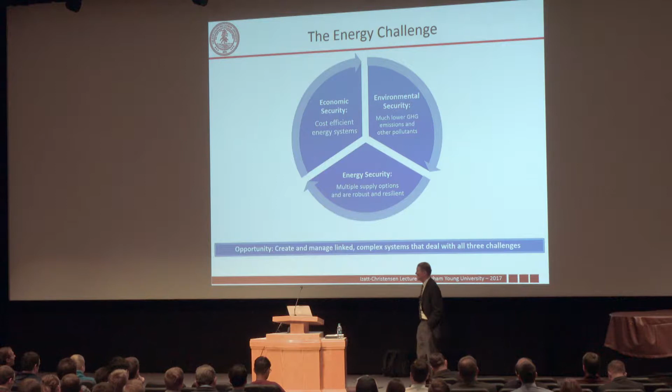So if you think about the energy challenge, it really has three parts: economic security, environmental security, and what I would call energy security. Let me just say a word about each of those.

On the economic side, energy is woven through every aspect of modern society. A good exercise, if you want to think about this, is when you wake up in the morning, think about everything you do during the day, and make a list of how you used energy. Did you take a shower? Did you use your toaster? Did you get in a car and drive somewhere? On and on and on. You can do that on your own, but it's hard to live in modern societies without taking advantage of energy, and those costs are embedded everywhere in what we do.

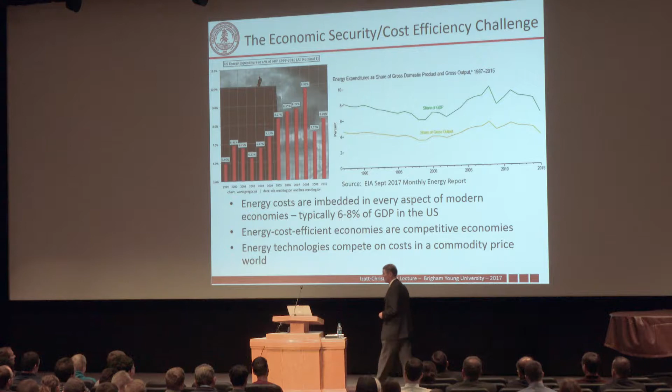It's typically in the U.S. 6 to 8% of the GDP, so that's a big number. Economies that are efficient in the way they use energy, particularly cost-wise, are ones that are economically competitive in the world, and that's something we want. Cost matters here. Energy is supplied and used as a commodity, so one of the things we in the research community need to do is work on ways to bring costs down, to make things more efficient, and everybody will benefit.

I would also say we have a responsibility, I think, as humans, to work on energy access around the world. Somewhere around 1.3 billion people don't have access to electricity now. We've made lots of progress in poverty around the world, but that number really hasn't changed over the past decade. So there's a chance to work, and of course I know many of you have worked internationally, there's a real opportunity to do better than that, particularly in sub-Saharan Africa and developing Asia. We should add that to our list of important things to do.

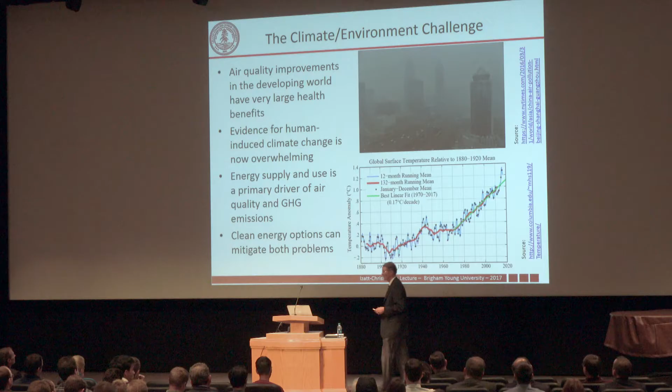So you say, okay, fine, what kinds of things are we trying to change? Well, right now, of course, 85% of the energy we use around the world comes from fossil fuels. And those are carbon-based. If you look at carbon emissions, they really have grown quite a lot in the last 2.5 decades or so.

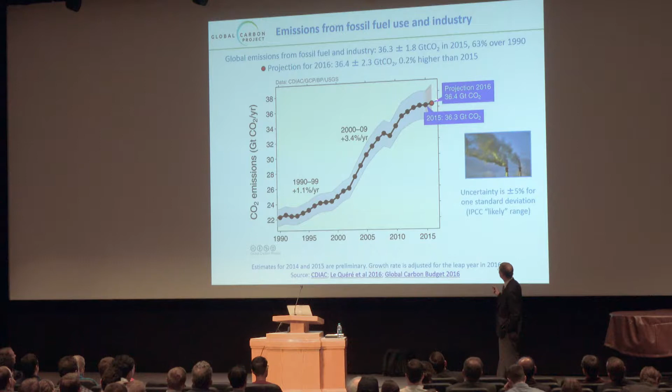But the interesting thing is that they have been kind of flat for a while now. Part of that was due to a global recession, and that's not how we want to do this—it would be better not to take that tack. But at the same time, there is some evidence that we're beginning to transform the system.

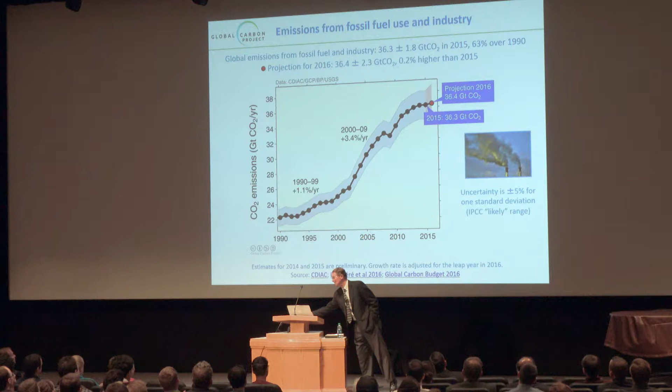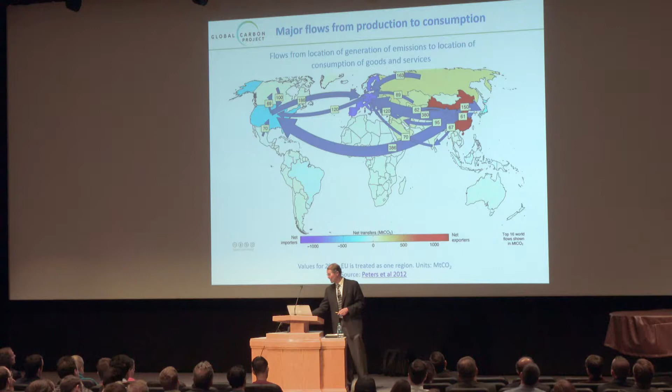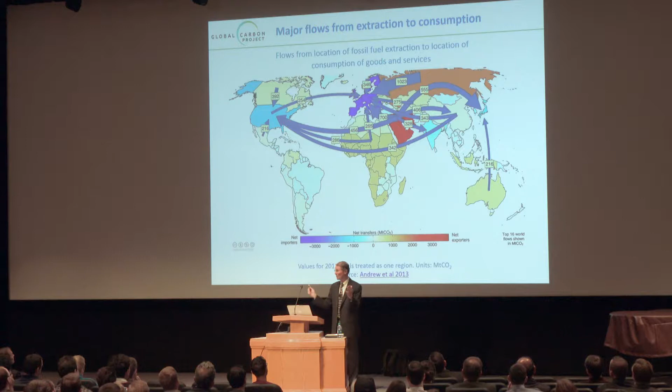So you say, okay, fine, we're convinced. Now let's do something about it. If we are not using the fossil fuels, or if we're using them in some other way that makes that lower in carbon emissions, what do we do? What energy resources can we use?

But the message here is that there really is no shortage of energy. There is plenty of it around. It's all about how we convert it from whatever primary energy resource it is into an energy service like electricity or warmth or any of the kinds of things that we do.

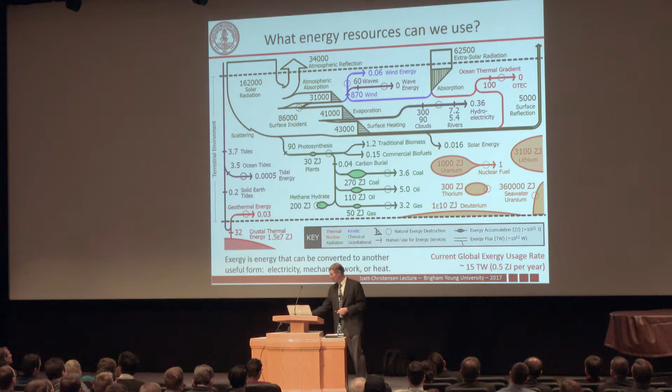So the problem is not the energy. So what do we do now? Well, and is it changing?

This is U.S. energy, and you can kind of see the top part is primary energy production. There's been a big transformation—oil production has really changed over the last 6 or 7 years in the U.S. Natural gas production has gone up, coal production has gone down. In energy consumption, natural gas is a bigger fraction, petroleum is just about flat, and coal has declined a fair amount as well.

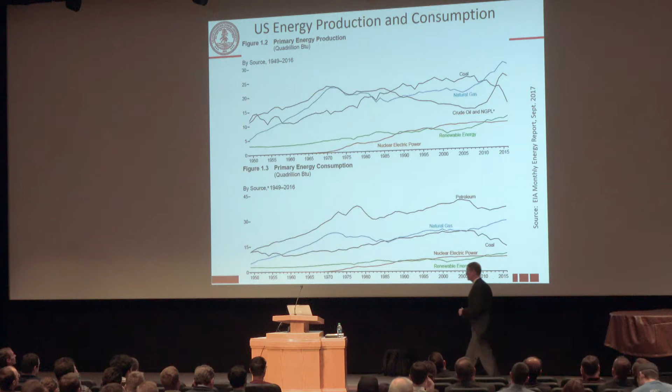Nuclear power really has stayed the same, but renewables are growing. So let's take just a moment and look at some of that. This will be interesting to see if I can manage to stay on the stage while I do this.

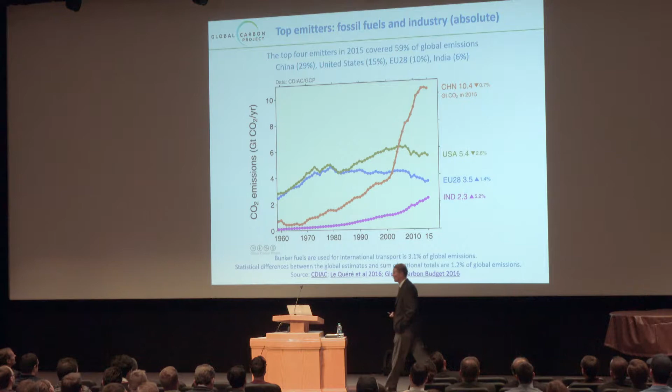If you look at the top emitters around the world, China has really grown very fast in recent years. The U.S. has actually declined a bit. Europe has declined a bit. India is increasing as well. These two reflect the growing developing economies and are both a challenge and an opportunity.

If you just look at the share of emissions from energy use and making cement. Cement is made from basically calcium carbonate rocks. What you do is heat it up, drive off a CO2 molecule, and you're left with calcium oxide, which then you later react to make concrete.

I said that natural gas has increased in this country. There really has been a revolution in the last decade, but it was a revolution a long time in the making. It required the ability to drill long-reach horizontal wells, this kind of magical control. It's like, in a way, taking a piece of spaghetti and trying to drill through Jell-O by pushing the spaghetti through the Jell-O.

You go, wait a minute, this is never going to work. What does work, however, is to pull the drill string through there, and at the same time, these rocks, the shales, are ones that it's very difficult to flow through. So the way you make it possible for the gas stored there to flow is you create some cracks in the rock. That's the hydraulic fracturing part.

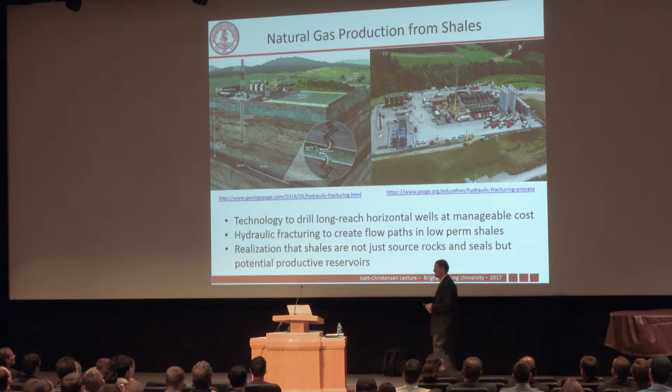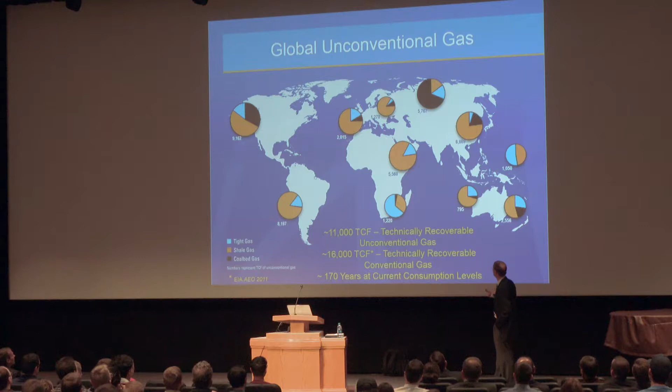Turns out there are lots of these shales around the world. Ours are deep marine shales that have lots of organic material in them. China's shales are there too, potentially lots there, but they are not as productive as the ones here in the United States. So we're still kind of exploring how all of that is going to work.

So you can say, okay, how is this changing the mix of energy that we're using? And the answer is partly slowly, because these are enormous systems. But if you just look at new power capacity additions by fuel, coal plants are still being built, but some are being retired, particularly in this country due to market forces. Solar PV is big, wind has been big, natural gas has seen some installations and retirements. If you add up all the renewables, about two-thirds of the power capacity additions last year were renewables.

Now, word of caution here. Capacity factor is what fraction of the time you actually use that resource. It's typically maybe 20% for solar, might be 35% for wind, might be 95% for a nuclear power plant. So if you weight these, this is what's on the nameplate capacity, not necessarily how much power it produces.

But if you also look at energy consumption by energy type, you can kind of get a sense of the trends here. Coal is still growing, but perhaps the beginnings of a peak. Oil is still growing—oil to first order is transportation, diesel fuel and gasoline. Natural gas is growing fast. Nuclear is pretty much flat. Hydro is growing nicely, and other renewables at 15.2% a year. So the renewables are growing fast, but they're doing it from a small base. We need to examine that and see whether that can continue and continue to contribute.

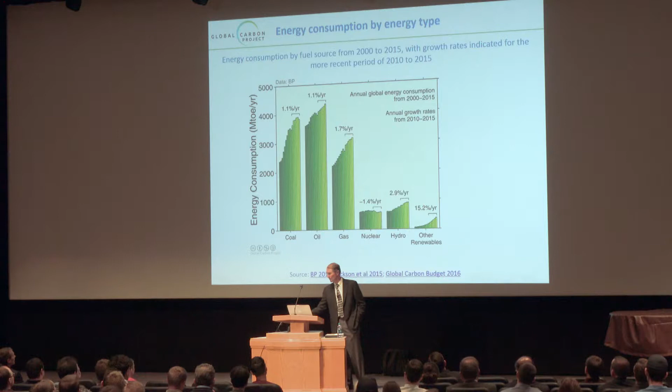And the answer is yes, partly because there have been deep cost reductions over the past nine years. If you look at these against the 100% baseline in 2008, wind is down by about 30%, utility-scale photovoltaics by about 50%, batteries have dropped in cost, and LEDs are down over that period by about 94-95%. So you go, wow, how did that happen? Well, part of how it happened was that we began to get to scale in manufacturing them. The first LED bulb I bought cost $60.

You might say that was economically crazy, but hey, that's what I do, right?

At the same time, as manufacturing took place a year and a half ago, India bought millions of these at about $1 each. Learning by doing and figuring out how to manufacture at scale really did reduce the price. So that's a possibility.

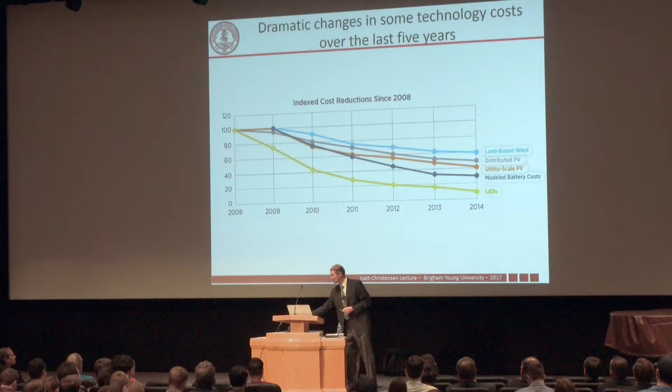So what lies ahead? The first point is that we should work to improve energy efficiency everywhere. We've left ourselves a lot of room to do better in this country on energy efficiency, that's the politest way I can say it. We can do lots of things that reduce energy use at negative amortized costs—in other words, it pays more than pays for itself. So you ask, well, why don't we do it? And that comes back to these pesky humans who make decisions that aren't always economically rational.

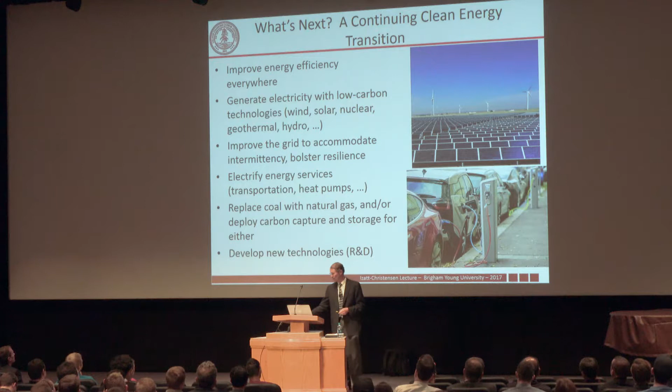Then we should generate electricity with low carbon technologies, and there are lots of those. We need to improve our grid to accommodate the different set of services that go with intermittent renewables, and we need to work on bolstering resilience, as Puerto Rico and Napa Valley have both illustrated. We can electrify energy services like transportation and use heat pumps more effectively. We can replace coal with natural gas, or deploy carbon capture and storage for either one. Or, and I'll argue at the end that we need to be willing to do this, we could develop and deploy new energy technologies. Let me take a moment to talk about each of these.

If you look around this country, about 40% of all the energy we use ends up in a building somewhere. So that's a place we ought to look. With technologies that pretty much exist now, we could get that down by a quite substantial amount.

I can tell you the experience of my own house. About 10 years ago, when I put in solar cells—they cost a lot more then, I wish I'd waited—I looked at the energy use and sized the system. But while I was waiting for the panels to arrive and be installed, I got out my watt meter and went around and measured everything in the house. The stuff I couldn't unplug, I looked at the nameplates. By the end of that, I had a pretty good idea where the electricity was going, so I could change the way I operated things. With a capital investment of maybe $100, I reduced our electricity use by about a third. I'm pretty sure I'm not alone—there really is an opportunity.

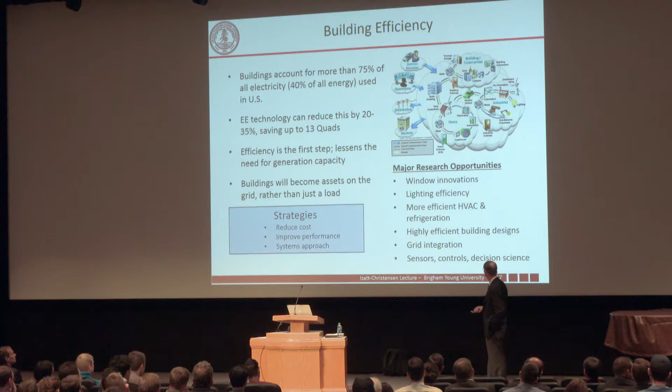There are lots of things we can do: windows, lighting. In my house I'd gone to compact fluorescents, but now I'm switching everything to LEDs. Heating, cooling, and refrigeration are areas, particularly in the developing world, where there's real opportunity to do better. With efficient building designs, our experience at Stanford has been that the incremental cost of designing and building an energy efficient building is maybe 2%—not much, as long as you build it in from the beginning. So there really is an opportunity.

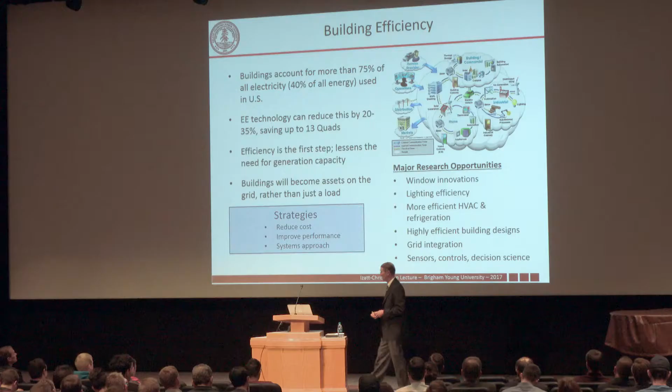Here I'd also say this whole question of sensors—I think we're entering sensor world. We're able to build less expensive sensors now that can communicate wirelessly and less expensively. This causes an avalanche of data we have to think about how to use, but nevertheless there are lots of opportunities for improving efficiency there.

Let me say a word about what we did on the Stanford campus, because I think there's a lesson in this too. We had a 50 megawatt gas turbine on campus, combined cycle, pretty good for its day, which we used for heating and cooling. But we noticed there was this overlap all year round of taking heat out of buildings with the cooling loop and putting heat back into buildings for other services—some in wintertime for heating, but there were all those others too. So instead, we replaced the combined cycle plant. It was at the end of its life, and we also needed to work on a leaky, creaky steam distribution system.

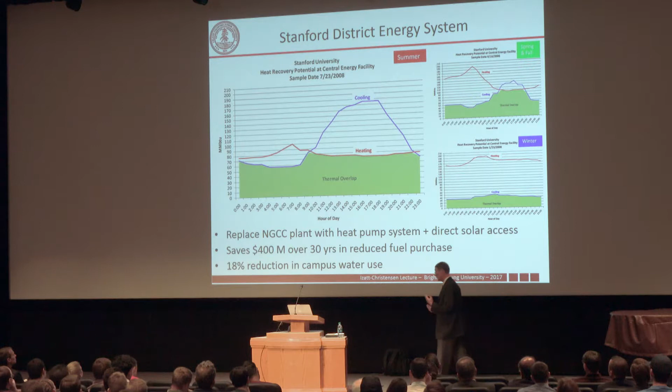The basic idea is you take the heat out of where you're cooling, you take the heat out of buildings, and push that back with the heat pump into the heating side, and not buy fuel to do that. It saves about $400 million over 30 years from reduced fuel purchase and reduces water use, which for us is a big limitation, by 18%.

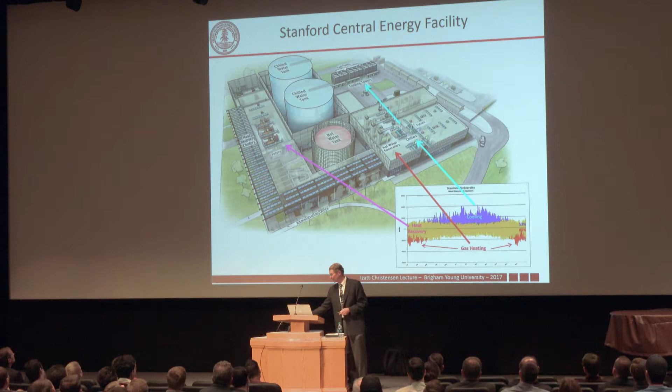So you go, well, all right, this sounds pretty good. How do we do that? There's a set of heat recovery chillers - these are just big heat pumps. They're various natural gas fired hot water generation, so there's a little bit of gas heating here, and then there's some cooling towers as well. So we can put that together, and they also worked on a very cool control system that really helps things as well.

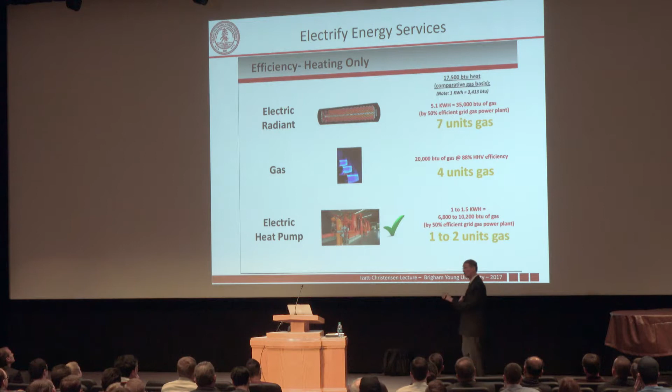The fundamental reason for this is that if you just use electric radiant, that's basically how your toaster works, right? Because of the thermodynamic hit that comes when you make the electricity and then turn that back into heat, that one may use 7 units of gas for the service. You can heat directly with gas, that does 4 units, but if you use a big electric heat pump, even paying for the electric power it takes, you can use 1 to 2 units of gas, and if you're willing to put some solar or wind into that as well, you can reduce it further.

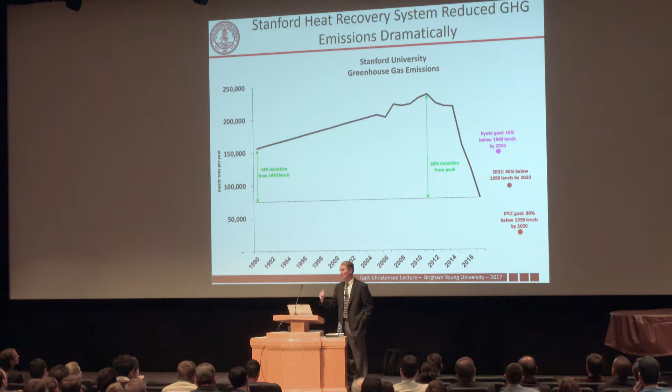So what this did was give us - this is actually measured - so far a 54% reduction from 1990 levels and 68% from peak in our greenhouse gas emissions for the campus. And I note again that it saves hundreds of millions of dollars over time, so this is a project which pays for itself by a big amount.

So what about clean electric power? Well, obviously wind we can use. This is growing rapidly, about 5.5% of U.S. electricity, but it was 4.5% last year. So this is growing - adding 1% of the electric power generation for this country in a year, that's a big deal. And it is 77,000 jobs in 2015.

There are lots of research opportunities for how these things can be done. It turns out that if you can steer the wind turbine so that you line it up in the wind, you can actually steer the wakes so they don't interfere with the other wind turbines nearby. This takes lots of computational power to figure out how to do this, but there are remarkable things we can do there.

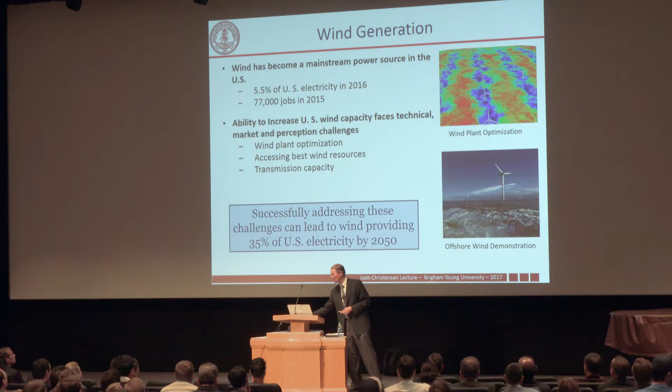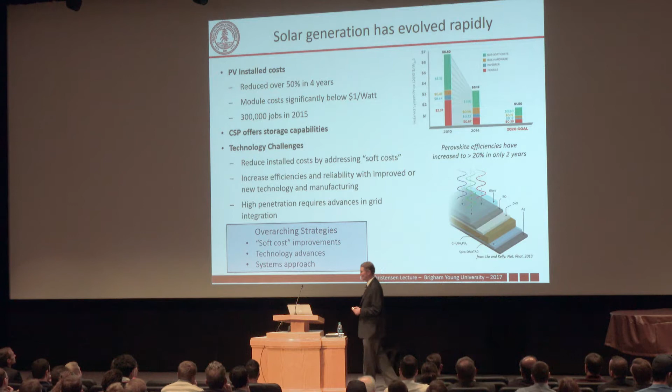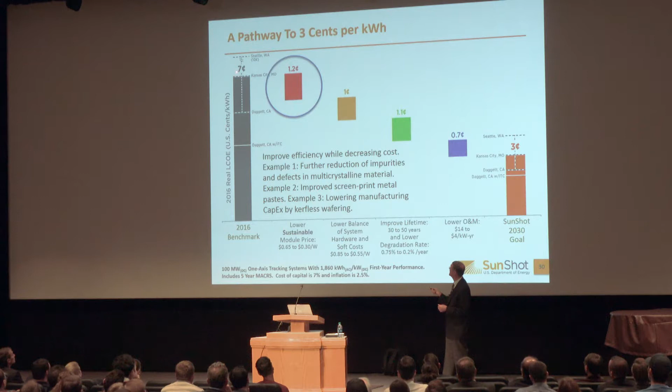I'll talk a little more about the technical details in a moment, but near the end of my time at DOE, it's pretty clear that we're going to make the SunShot goal for 2020 of 6 cents a kilowatt hour - we're about 7 now, so we'll make that before 2020. But then we said, well, what else can we do? We eventually convinced the secretary that there were multiple pathways to get down into the 3 cents a kilowatt hour range, and maybe even 2.

You say, well, gosh, that's really competitive, why do you want to do that? Well, the answer is because if you get to those kinds of costs, then you can afford to do another transformation that involves energy storage. It could be liquid fuels, it could be all kinds of things that gives you some room to do that.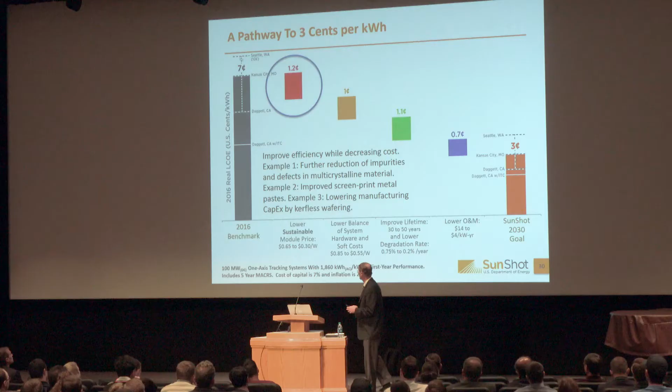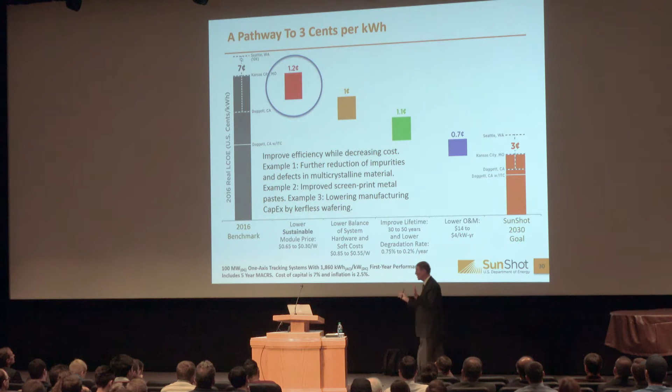Now, I don't mean to minimize the difficulty of doing this. There's lots of options - you can see module prices, balance of system hardware and installation costs, lifetimes, operations and maintenance, and there are lots of things to do here, and we did lots of analysis of each of these. So what are the options? I'm not going to go through all the details here, but over the last 15 years, a project I worked on at Stanford really invested in the fundamentals of all this.

In that period, we put together one cool idea after another for ways to manage light, to get lots of light absorption, but easy ways to catch that electron before it recombines with the hole. If that happens, you have a warm solar cell, but no electricity. And these new things called perovskites have just rocketed into our attention as ways to generate more efficient electricity using advanced material science.

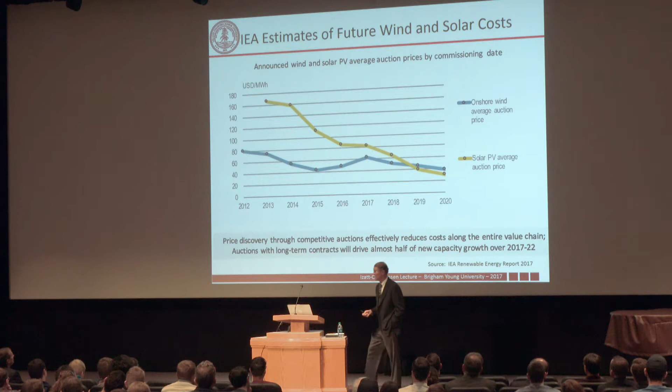So if I picked out one area that really applies across almost everything, it's the material science side of things. If you look at the International Energy Agency's estimates of future costs, this is a quite recent report. Even these are based on power purchase agreements for delivered costs and long-term contracts, so these are real data, and they show continuing declines in cost. They're not as low as the ones I showed earlier, but in places without grid access, this really makes a big difference.

What about the nuclear side? Well, about 19% of current U.S. electric power generation is from nuclear. It's base load - these plants run over 90% of the time. And you say, well, is there an issue? And the answer is yes, and it's cost.

These plants are having a hard time competing in areas where dispatch is based on a bid system, and natural gas can supply this electricity at a lower price now. So some of the plants are struggling. There is one possibility on the horizon that might make a difference here, though it remains to be seen - that's a small modular reactor.

There's a kind of mock-up of what one might look like here. There's a company called NuScale that has just submitted an application for design certification, and they have agreements for the first couple of these reactors to be installed. They come in 50 megawatt lumps, not 1,000 megawatt lumps. So the cost per watt is about the same as a big nuke, but you don't have to lay out $8 or $10 billion to buy one of these.

So if you bought my argument about getting to scale, having smaller unit costs is one way to try to deal with that problem. There are plenty of research kinds of things going on as well, but they are much farther out, and they require big government investments because they're so expensive to do. Waste storage, siting, licensing and construction costs are all still big issues.

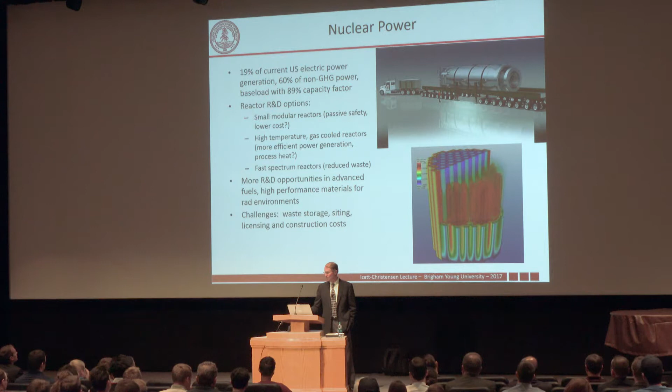There is a fair amount of construction going on around the world. China is building 24 plants right now. So the situation in the United States is not exactly the same as elsewhere.

On the carbon capture and storage side, we capture commercial quantities of CO2 every day, in refineries and natural gas purification, so you can sell the gas. These are mostly done with solvents - amines of one sort or another. The real problem is cost.

And so there are lots of cool things - I'll talk more about this tomorrow - and there's some very interesting things going on here at BYU that it's fun to think about how those can contribute.

You then take that CO2 and put it into the subsurface. We have a lot of experience with this - we've been doing it for enhanced oil recovery since the early 1970s. So we have a lot of experience of what happens in the rocks underneath. You have to choose sites well and operate safely, but when that's done well, we can put the CO2 there and keep it there.

Now, there was a very big DOE-funded project at a plant called Kemper, which was a gasification project, combined cycle, plus carbon capture, and then using the CO2 for enhanced oil recovery. It had lots of cost overruns, and this was a pretty complicated sort of 5 chemical plants put together, and they could never get all the pieces to work right.

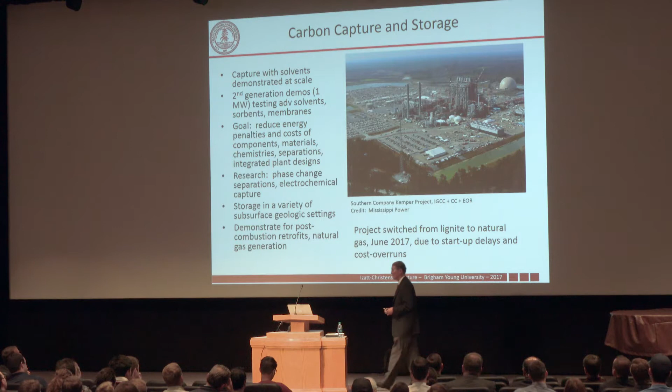And finally, the state Public Service Commission caused them to switch from lignite to natural gas in June due to the startup delays and cost overruns. So that was a bit of a blow. We'll see - there's more to be done there.

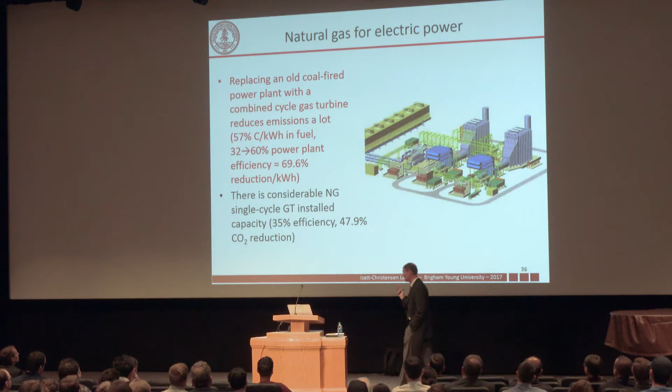But I would note that on the natural gas side, just replacing an old coal-fired steam power plant with a combined cycle gas turbine - there's less carbon in the fuel, and the efficiency of the power plant is much higher. And so therefore, you get an almost 70% reduction in CO2 per kilowatt hour just by that switch. And if you use a single cycle turbine, you're still in the almost 50% range. So there is a big benefit, and this is being driven by the market at the moment.

So let me say a word about the grid. Here's the old grid: you had a bunch of big power generation facilities, largely radial distribution out to customers.

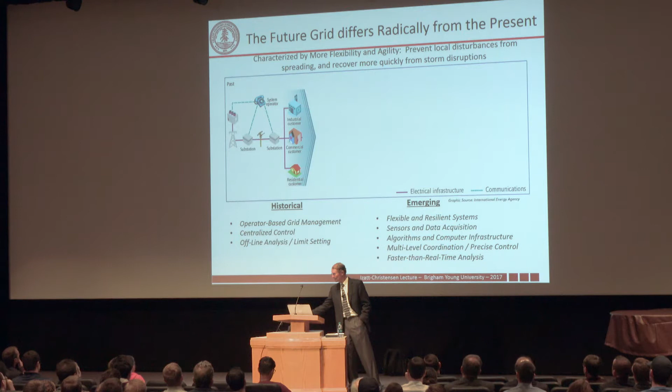And that is changing because we're starting to have more distributed control, and eventually we'll have a system that's got lots of distributed generation, lots of intermittent renewables, lots of those of us in high-cost electricity areas generating our own electric power at home and selling it back to the grid.

And of course there'll be all those smart meters that are actually sensors that tell the operator whether there's power where I am. It used to be that they had to drive around in a truck and shine their flashlight to look and see where the tree had fallen on the wires. Now they can tell that by which smart meters are reporting back, at least in the places where the smart meters are all connected up.

So there's really a lot of potential to provide much better services and faster recovery when we have problems, provided we do this in the right way.

Now, this is not without some challenges. So in California now, we have enough installed wind and solar that in the middle of the day, we can cover a quite remarkable fraction of the power generation during the day.

But of course, as the sun goes down low on the horizon in the late afternoon, and our wind resource is bigger at night but hasn't picked up yet, we can get some pretty astonishing ramp rates of power needs into the early evening.

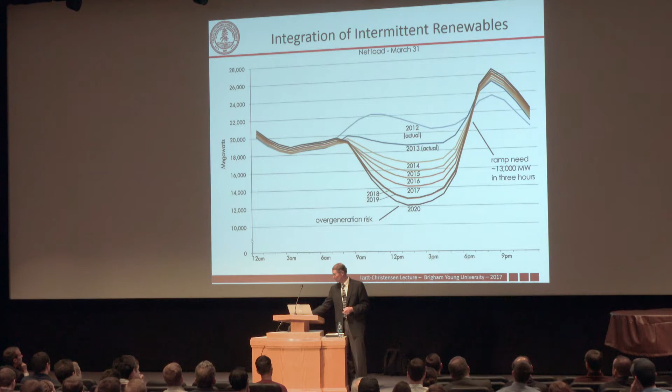Now that's accommodated by natural gas, and that certainly can be done, but you have to think about balancing all those systems. Now one option there is to think about more storage, and there's lots of work going on here.

And the thing to remember is that the storage issue for batteries in an electric car is pretty different from the grid scale part of this.

And there are a whole bunch of things being tried for really bulk power. Pumped hydro is the only real game in town. Compressed air energy storage has been talked about, but has really not been deployed. But pumped hydro has great round trip efficiencies, much better than batteries. But you have to have a hill and a big place to put the water.

That might not be a problem here in Utah. Well, they had their own problems with where to put the water, but it wasn't at a high elevation, I can tell you that. That's where I grew up, and my neighborhood was underwater.

So I'll just say that this is a huge area of research. It's fundamental material science, it's chemistry, it's chemical engineering. It's just full of interesting problems to be worked on. So there's a lot to do here.

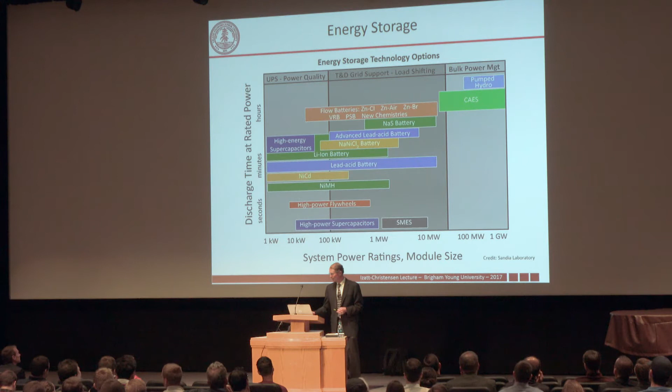And so let me finish with, in a way, a sort of speculation. So in the last six months that I worked at DOE, we asked ourselves: well, suppose we manage to meet all the goals that we have for the various energy technologies, the solar, the wind, and so on.

We then use the so-called NEMS model—this is a National Energy Modeling System. Sometimes it was hard to convince the model what to do about battery electric vehicles. There was no knob for battery electric vehicles. So we had a variety of challenges to just get this into the model.

And then we said, well, if we did a projection of CO2 emissions, this was kind of the business as usual as we are now. But if we met all the advanced technology goals, you can see that's the kind of darker blue line. And then we cooked up some goals that we call stretch tech.

Now, there was a big argument about how plausible some of these were, so I wouldn't bet your future on any of the details here. But nevertheless, we could see that it had an impact. And then we did a couple of cases using a quite small carbon price as a proxy for other regulatory kinds of things that might happen.

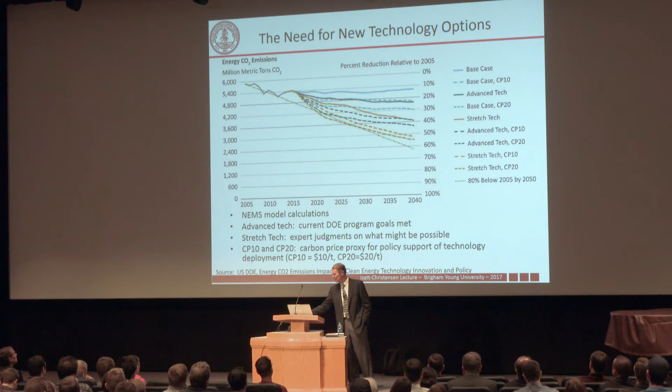And the net result was that with those together, there was an interaction between the policy side and the technology side that got us well down the road on the kinds of reductions we would need to achieve a reasonable probability of staying in the 2 degree C climate change regime.

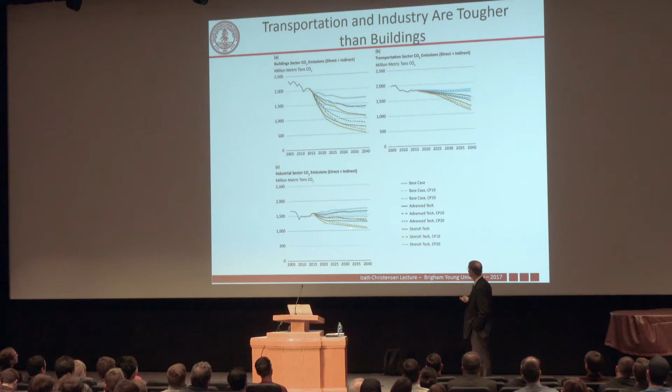But the situation was pretty mixed. We could see pathways for pretty deep carbon reductions in the building sector, largely due to better electricity, so that helps. Transportation is much harder, even with lots of deployment of electric vehicles. It's tougher, and the industrial sector was tougher too. So there are some big challenges there that we have to meet, but it's not hopeless.

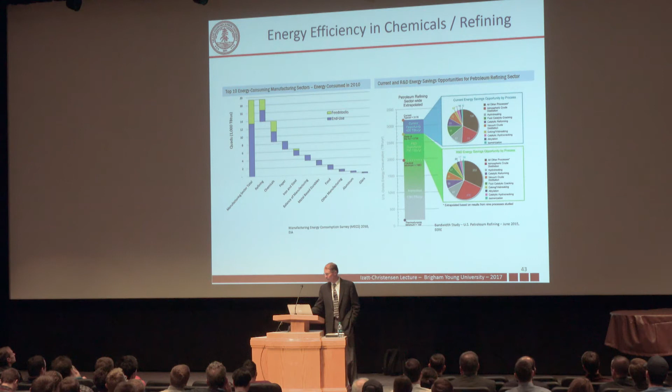One of the things we did for industry was to look at refining—we did this a lot for lots of industries. We could make significant near-term efficiency gains with lots of different technologies, and there were some good R&D opportunities for more. Thermodynamics limits what you can do entirely, but there's a big potential here, and there's plenty of room for creative research on all of our efforts.

Internationally, we have made some progress. The commitments made at the Paris Agreement get us about halfway to what we need to do to stay within the 2 degree C goal. The U.S. made a commitment of 26 to 28% below 2005 levels by 2025.

The current administration's view is that this isn't in our national interest, so I don't know if we'll get all the way there. Well, a lot of this will happen anyway because it's being driven by market forces. China is going to hit their peak earlier than they committed, I think, and the other 195 countries have issued plans with varying levels of ambition, so those offer a real opportunity to go forward.

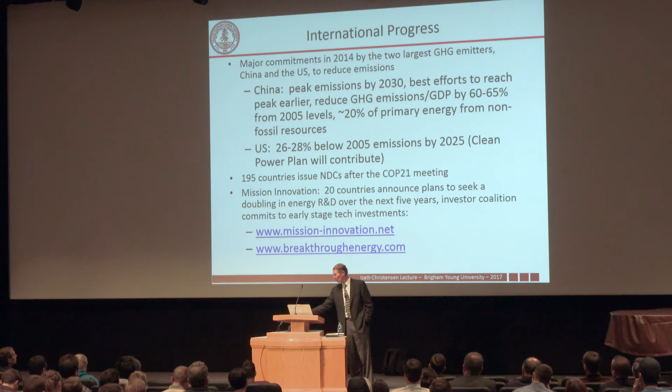As I said, we've announced that the U.S. will withdraw. You can probably guess that I think that's a mistake. But a whole lot of state governors, mayors, and company CEOs responded, saying we're looking at the long term here, we can see what's coming, and we're going to meet our goals and try to make those even more ambitious anyway.

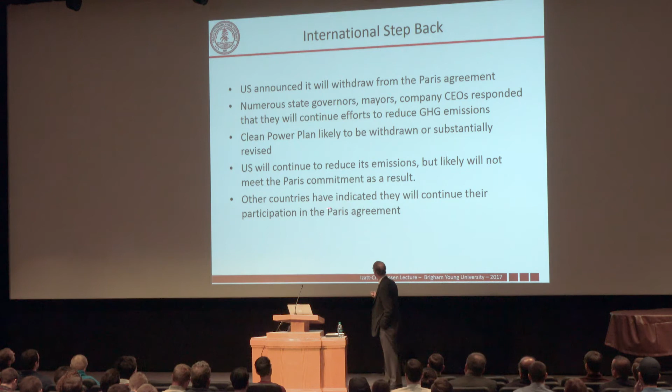The Clean Power Plan is now likely to be withdrawn, but even there, a lot of states will meet their commitments, including Texas—which said, 'but it's not because they made us.' We're a combination of natural gas and lots of wind. Texas is a big leader in wind. So I think we'll continue to reduce our emissions, and other countries will continue too. This will be important.

So let me finish here. I think a clean energy transformation is well underway. We've made some progress, but there's a heck of a lot more to do. And in particular, it's all of you students in the audience who have to do this—stick with it, do everything we can now, and stick with it over an extended period. There's a huge opportunity space.

It should be a portfolio. It needs to be fully diversified across primary energy resources and all the ways we convert those into energy services, but that gives us this magically broad set of opportunities to do better.

There needs to be efficiency everywhere, and by the way, there's a pretty big market out there for this. The world will spend $60 trillion on energy infrastructure between now and 2040, and at least a quarter of that—I'd argue more—is going to be the clean energy side of things. So there's a pretty big market out there for countries that do a good job on this to lead the way. We can do this, so let's get to work. Thank you very much.